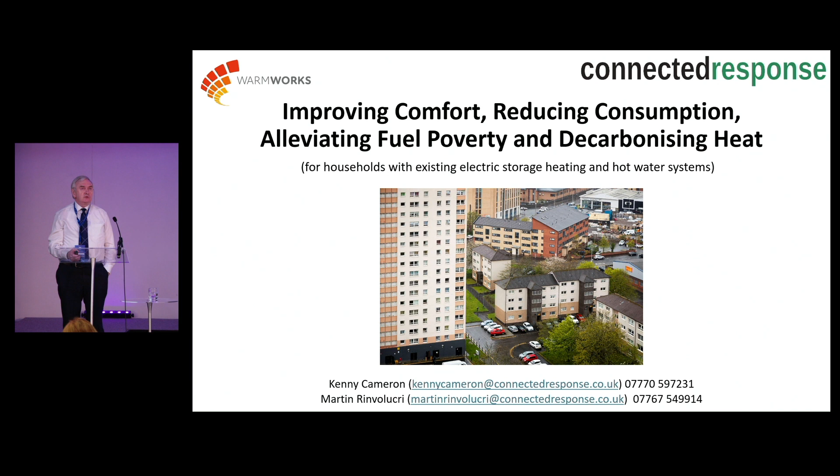Good morning. My name's Kenny Cameron. As Russell has said there, I'm one of the co-founders of Connected Response. We set the business up 5 years ago. It was 10 years in the making, though, because all the technology we have started in a 100 million turnover meter asset manager. Where I worked, we developed technology for social housing, actually with Westminster City Council, but it was never taken to market. So the business was formed to take technology that was there into a new market, not just in London, but across different parts of the country.

The focus for us has been about taking storage heating, which is incredibly maligned with good reason, because storage heating has been an invention in the UK for the last 40 years that generally has delivered bad heating experience for tenants. Not because storage heating can't work, but because for 40 years we've charged them at times to suit the electricity industry, not to suit the people that should be benefiting from the heating.

Storage heating was an invention to get rid of nighttime surplus nuclear generation. So it was quite an unashamed attempt by the electricity industry to dump something they didn't need and pretend it was a heating system. And I'm not making that up. There's long-serving people in the electricity industry that would freely admit that. So the concept was to try and do things better than they were before with existing heaters, to make people more comfortable, help them reduce their bills, and also to contribute towards decarbonisation.

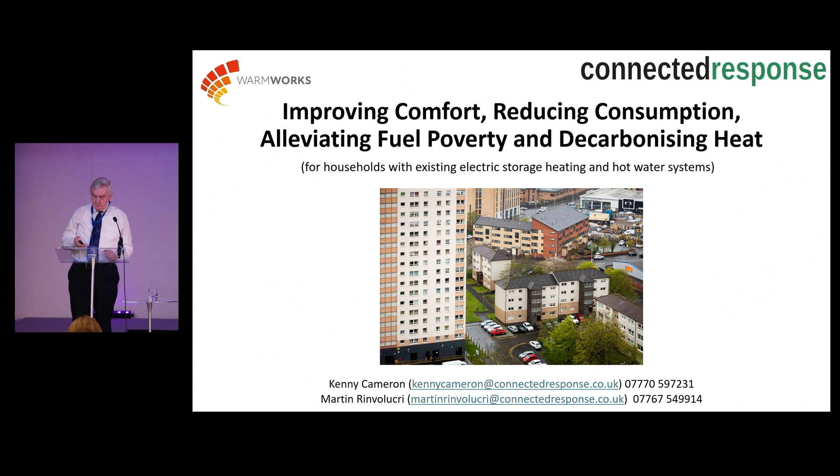There we go. And the problem with storage heating is that 99% of people in the country are on tariffs that are either Economy 7 or based in Economy 7. The concept of charging storage heaters for up to 7 hours a night, and that's a 24-hour day there, from midnight at one end on the left to midnight on the right along the bottom. And that's what happens when you put a big block of charging at night. You heat the storage heaters during the night. The blue line is the living room temperature, and the average temperature in a house that gets Economy 7 peaks at 8:30 in the morning. And I'm not making that up, that's from actual numbers we have from monitoring equipment in flats.

So it's pretty bad, and the effect of that is if it's cold outside, then that temperature declines gradually through the day, more rapidly on cold days, of course. And what you're trying to avoid is the situation where in the late afternoon and the evening, the house gets cold and people drop to maybe 17, 18 degrees. And that's not uncommon. So that's the problem. It's not the heater. The heater that we all talk about is night storage heaters. And of course, storage heaters don't know what time it is, so they'll take heat whenever you give it to them. So that's the problem that we've been trying to solve for a number of years.

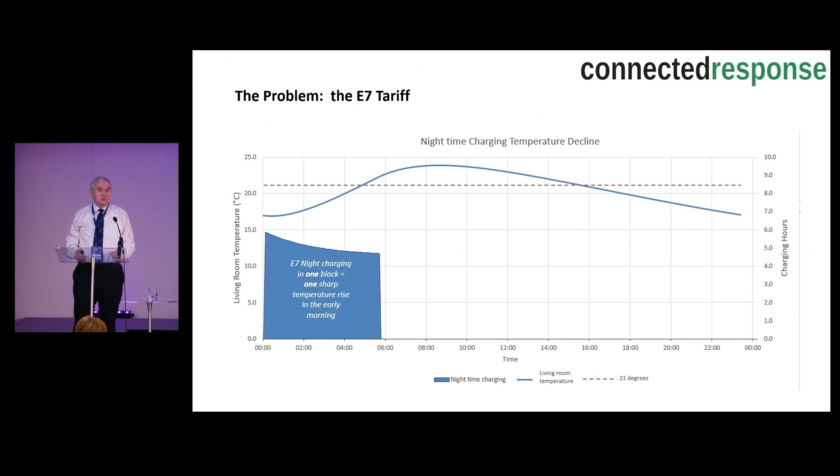We've been doing a project in Glasgow with Wheatley Homes Glasgow, formerly called Glasgow Housing Association, and that was to try and help them to do something positive for their 10,000 flats across Glasgow with storage heating, split roughly 80-20 between the multis and the low-rise. The breakthrough moment, light bulb moment for me back in early 2021 was we sat with their head of asset investment, and we realised his decision was going to be, do we invest in new storage heaters, or do we invest in new controls in those flats with storage heaters?

And I asked him the question, which was, how often do you intend to replace heaters? And he says, well, we're working on a programme to try and replace them gradually, and we've got money to do 1 tower block per year. And immediately I was thinking, you've got 132 tower blocks. So that doesn't sound as though it's going to happen very quickly. You'll have knocked them down before you've replaced many of the storage heaters. So straight away we knew there was a win-win, and they embarked on a programme there to put smart controls into all 10,000 flats, and they are 80% through that now.

We've done that with their direct labour organisation, City Building, who are a joint venture between Wheatley and Glasgow City Council. It's the former Works Department of the Council. And it's interesting to share it in this environment because I went into it quite negatively. I'd previously worked with City Building on a project several years ago where they were collaborating, or should I say not collaborating, with Keepmoat, a very tense relationship between two rival organisations. But I've got to say it's been a great relationship we've formed with City Building.

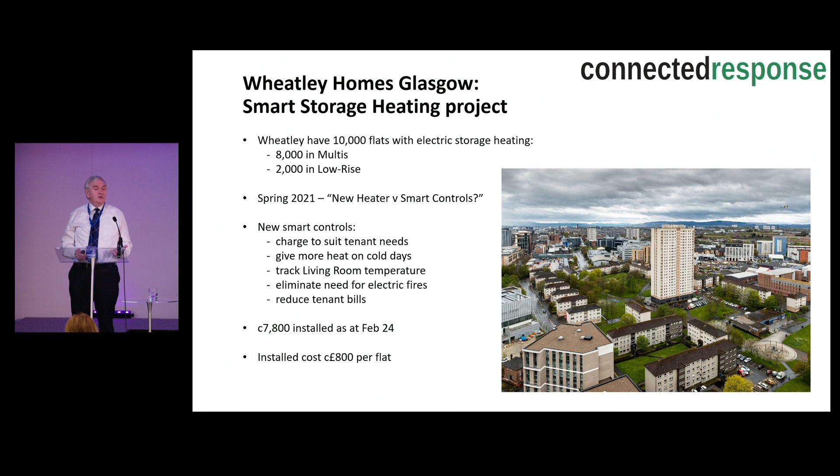The project began with the landlord setting aside money to replace 5% of heaters if there was old heaters there that were written off by the installer. The actual replacement was 0.5%, so it was a really minimal expenditure. And their average age of heaters when we started was 18 to 23 years old. That might shock you to think, are landlords still keeping those heaters going? But the view they took was, if the heater's working, we're not replacing it, we're charging it at better times.

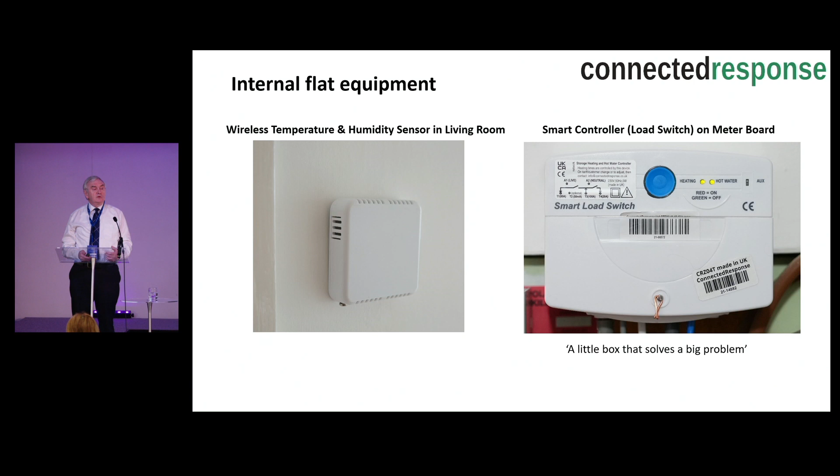That's what's installed in the flat. It's not very exciting. It's on the right-hand side, a smart controller that has two 100-amp contactors, one that controls the hot water, one that controls the heating, and in the living room, a temperature and humidity sensor that gives us feedback on whether we are delivering the service that's expected by the tenant. In a multi-dwelling unit application, the communications is run using a gateway, which is discreetly put into the building somewhere in an electrical cupboard, and using low-power radio, it's communicating to and from the switches and the temperature sensors.

The install in the flat only takes about 45 minutes. And by working with the direct labour team, the advantage in that is they are not only the installers, but in another part of their business, they are the maintenance guys. And maintenance is important because it's very naive to think you can go into a house and everything will be perfect. There's always consumer units that need work done, or other things that are unexpected. And that's been the great advantage of working with the team who are familiar to the tenant and are authorised to do other work when they're there if there's any remedial work required.

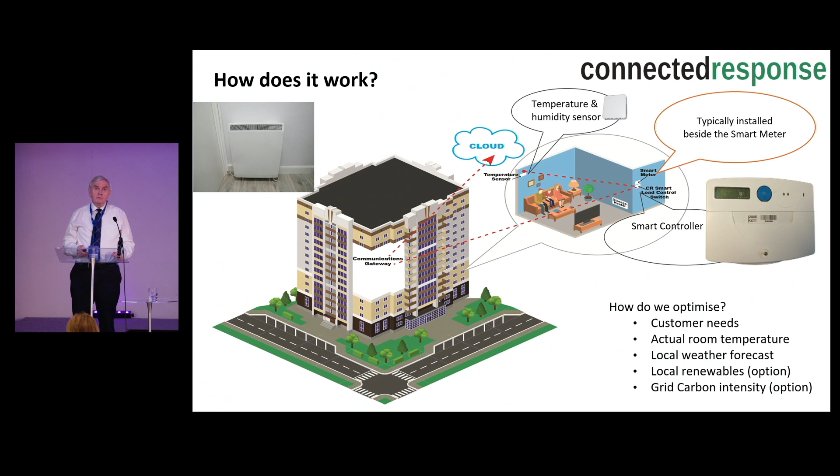The tariffs is a massive area where there needs to be continued change. I said earlier, almost everyone is still on night charging. We've been able in Scotland to get 1,000 people so far, 1,000 of the 8,000, onto a new tariff, which is also an old tariff, Economy 10, which means people get 3 charging times during the day.

So the tenants, I've got to say, tenants generally don't understand this. I've kind of given up on expecting that tenants will really understand what we're doing. I don't say that to be patronising, because I've often been in people's houses. 2 years ago, we tell them we will charge your heaters for longer on a cold night, and they understand it. And then 2 years later, when there's a VIP coming in, I'll say, remember, it'd be good for you to explain that it charges at different times every night.

And even the most intelligent people often say, oh, really? Is that what happens? So it's proof that the tenants don't care about the technology. They don't care how it works. They just want to be warm. And we shouldn't really expect too much of any of them, because people have many other things going on in their lives.

Time of use tariffs is an area that we spend a lot of time lobbying Ofgem, lobbying government, to say, don't allow suppliers to focus on developing tariffs for middle-class early adopters, tariffs for electric vehicles, for batteries, for solar. Unfortunately, that's where all the work's going on. And we are pushing hard to try and say there should be more flexible tariffs.

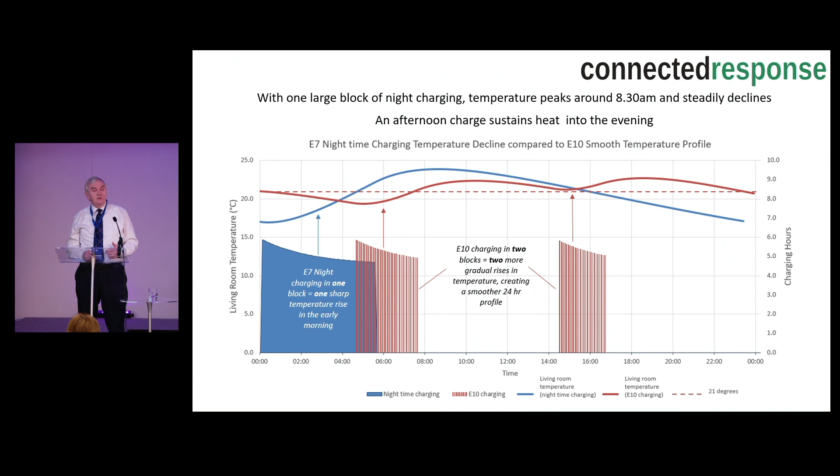I talked about the problem of Economy 7. That's how the Economy 10 looks in contrast. So think of it as, instead of the big blob of blue to the left, it's split into the blobs of red, closer to when they wake up, middle of the afternoon as well. And what you do is create a much smoother temperature profile, so you don't have the peaking too early, and you have the ability to watch television at night without having to either go to bed early or put a jacket on or switch on an electric fire.

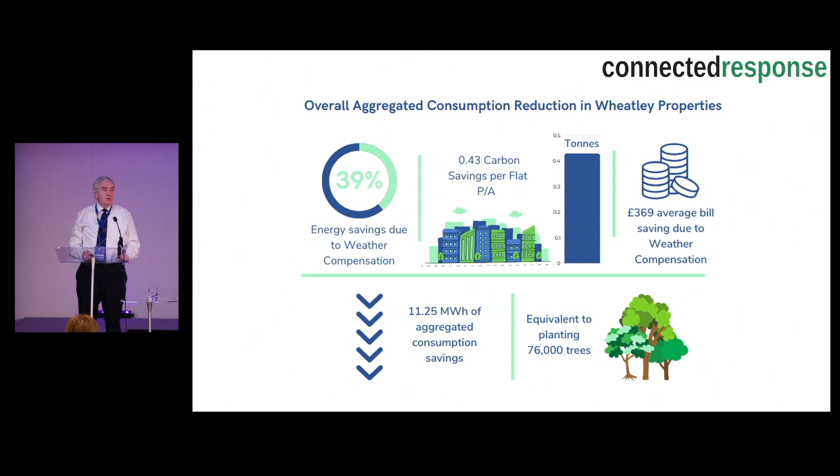These are some of the statistics from Wheatley Group in their interim report to Scottish Government, who part-funded, showing how much they've saved just by charging according to the weather, how much they've saved in terms of people's individual bills as an average, and also what contribution it's made to reducing the carbon emissions for the group as a whole.

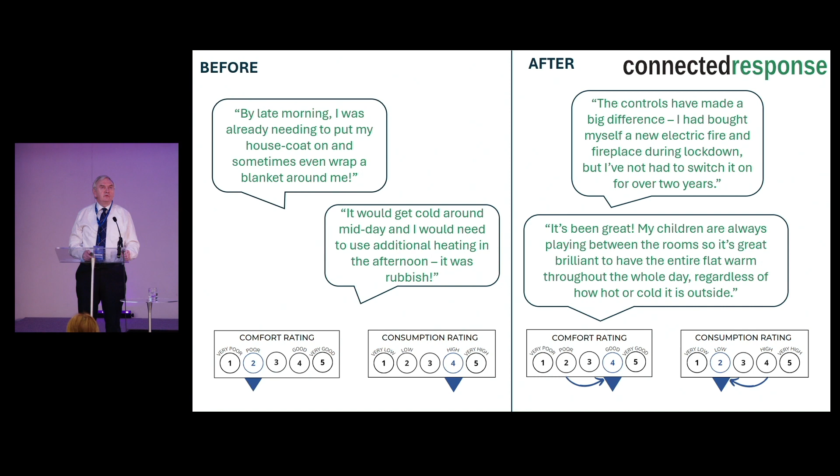We've just done a video for publication, and there's one lady in her early 50s, and she was most excited by saying, my brother even comes to visit me now. He never came before. Now he'll come at night because my house is warm. So things that are not that obvious in terms of the social benefit you can learn by getting good customer feedback.

I want to finish by just briefly talking about an organisation in another part of the country, the Royal Borough of Kensington and Chelsea. Someone earlier on was asking me what it was like working with them post-Grenfell, and it's actually been good.

I've worked with them before and after. If there was any observation I'd make, it's that they're so tenant-focused now that they sometimes do things at a slow pace, because they always want to check what the tenants, what the leaseholders will think about it.

We began working with them on this project in 2020. At that time, they charged all the storage heaters every night. Even in the summer, if people left the heaters on, and some did, then they got a full night charge. They got a full tank of hot water, even if their flat didn't have a bath and had an electric shower. So massive overconsumption, and some tenants who took advantage and others who complained about those that took advantage. So the project kicked off then.

The tower block, I'm not sure if any of you recognise it. It's often described as the ugliest tower block in London or the most beautiful, depends on your point of view. I think it's quite an attractive building, but I'm biased, having spent a lot of time in it. So Trellick Tower, that was the conditions before.

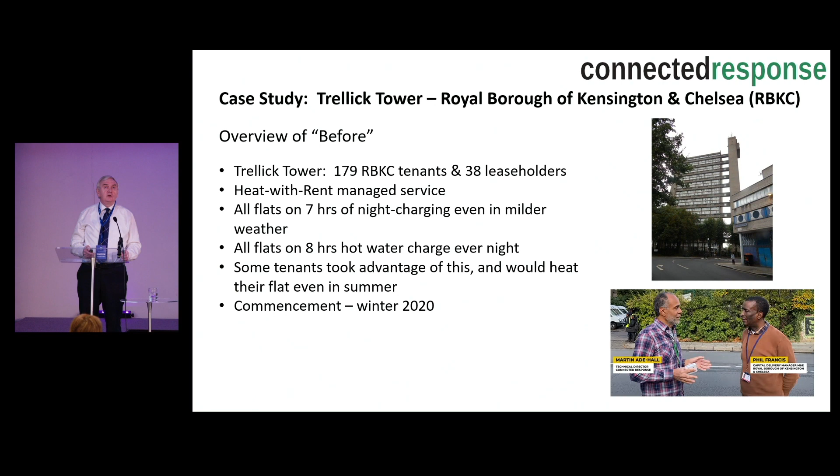And what the landlord wanted to do was to reduce the waste, because they knew there was massive waste. Reducing waste in turn would reduce people's bills. They wanted to improve the heating experience by not putting all the charge in during the night. And in the future, which has still not quite arrived, they wanted to be able to align the charging with renewable energy, because they knew that made sense.

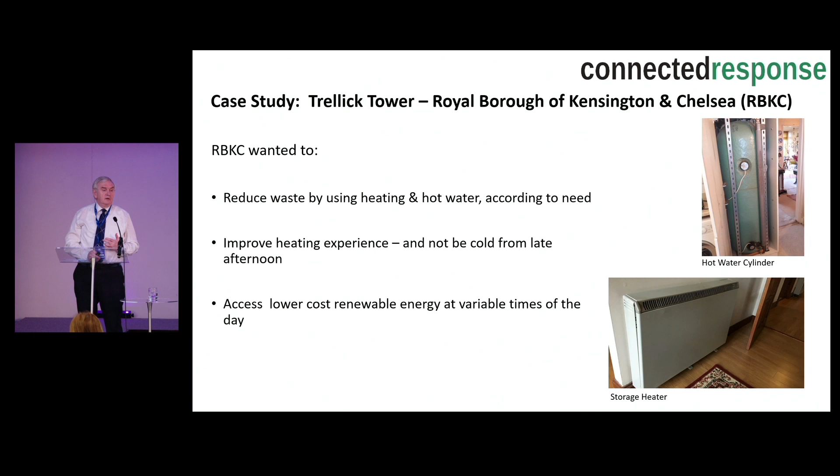We're actually just about to start a project that will every night charge the heating at slightly different times dependent on the carbon intensity of the grid in London. So it's a project to track how much fossil fuel generation is happening tonight. Is it at 3 in the morning? Is it 4 in the morning? So that our system can say, do we care whether we charge at 3 or 4? And if the answer is no, then to be able to flex every night. The predictions are it will reduce carbon emissions in that block by 14%. So for those who are targeted to do that, a very exciting proposition.

The project that we did was in 3 phases. It could have been in 1 phase. It would have saved them more money if they'd done it all together, but the conservatism I hinted at earlier meant that they started by saying, before, we charged everyone during the night for 7 hours. The first phase, they said, let's put the controls in and we'll give people 3 charges: nighttime, afternoon and evening. The second phase was to say, once we've done that, let's switch on the weather compensation and give them a lesser charge or a longer charge as appropriate.

And the third part, which happened maybe 9 months to a year later, was saying, we're massively over-providing hot water. This, I should have said, was a heat with rent scheme. So it's a managed service where people get the service and pay a flat charge every month for it. So they said, do you think they would notice if we gave them less hot water?

And we were sure they wouldn't, because they were giving probably 6-7 hours of hot water at one stage, and the landlord we deal with in Glasgow was recommending 2 hours. So we knew people were happy with 2 hours when they had a shower in the flat. All they needed hot water for was to wash hands and wash dishes. So we knew it was fairly safe to wind that back a bit, and that's what they did.

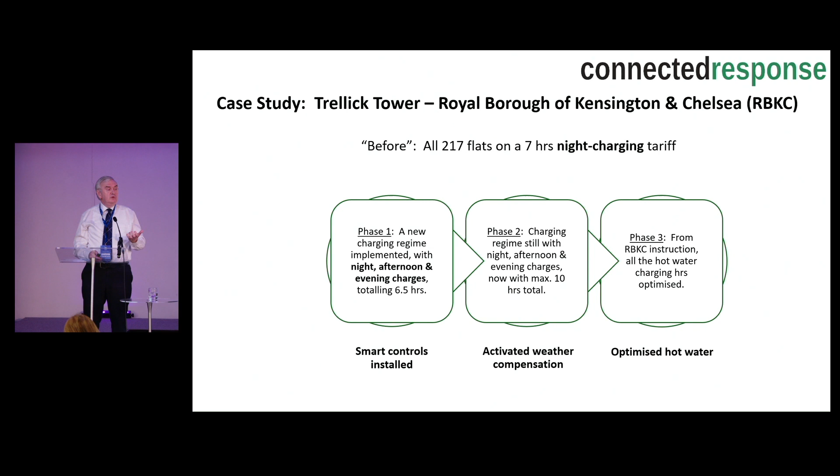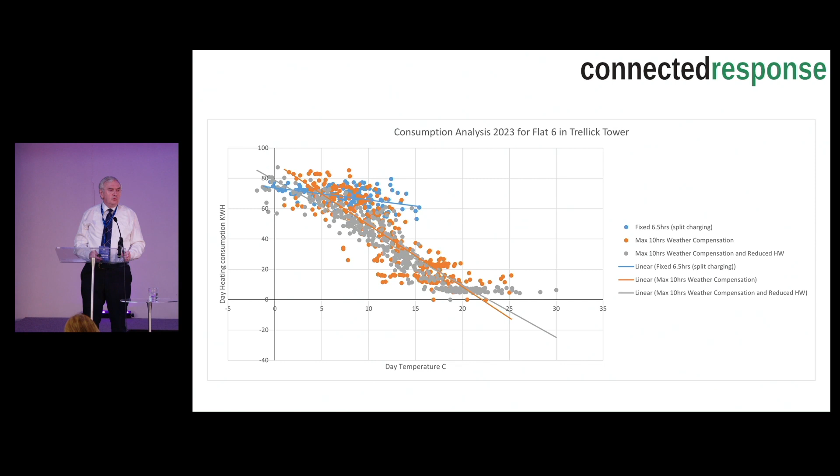The consequence of that was that we had half-hourly metering on all 217 flats, so we now have 3.5 years of data saying, what does it look like? What did we save? Did it impact on room temperatures? Don't worry about trying to understand this, but this was just for a typical flat, anonymised flat 6, to say how much energy did we consume, that's consumption up the left-hand margin, and how did that compare with the outside temperature, going up to about 30 degrees along the bottom axis. So we could plot what happened at each phase of the project.

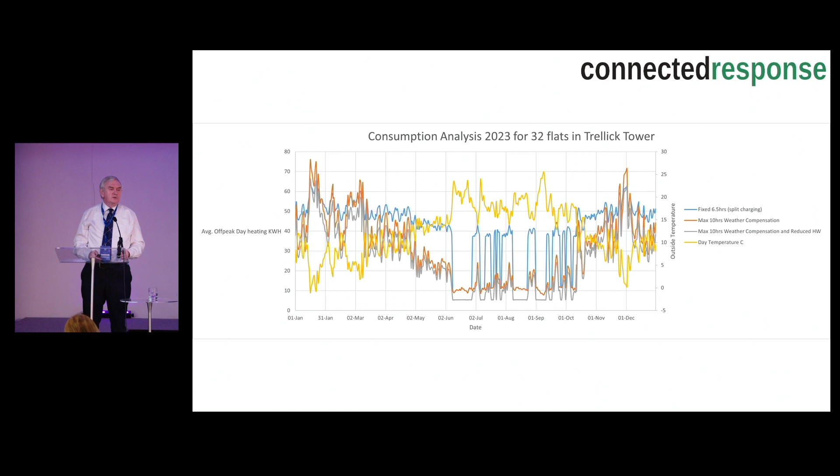We then could say, what does that look like in aggregate? I'm not asking you to consume that either, but we took the half-hourly data and said, that's what it looks like as an average. You'll see in the average, there's lots of blue spiking in the summer, because there are some days when people do want the heating on, even in London in the summer.

If we averaged it out over months, this graph tells us that the yellow line peaking in the middle shows it gets warm in summer, and on the left-hand side it gets colder in January than in December. So that's the outside temperature.

The blue line shows that people keep the heating on into the shoulder seasons of spring and autumn for much longer than they need to. There are people who will keep the heating on and open windows if they can get away with it. So that was the bit we're trying to change.

We switched the weather compensation on, which is the brown line, the first of the sloping lines, and then the grey line, which you probably can't see as a colour, was then optimising the hot water. So it gave us 3 phases to say, what difference does that make?

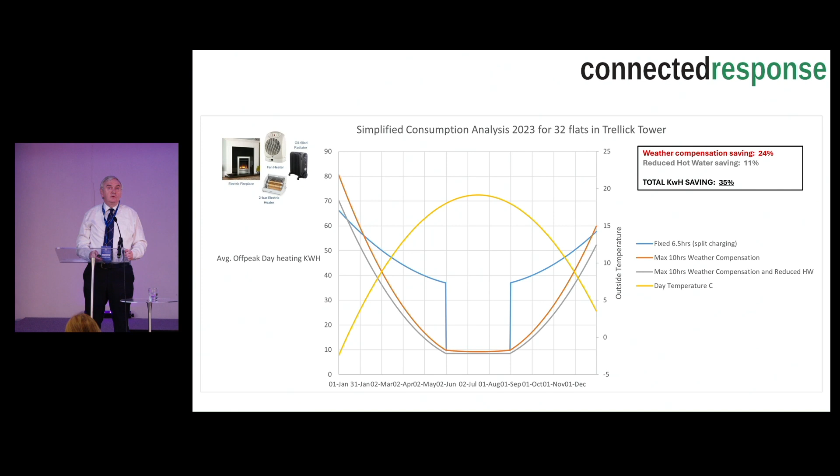The box on the right-hand side gives you the breakdown. The weather compensation, charging appropriate to need, reduced consumption by 24%, and optimising the hot water added 11% on top of that. So big savings, reductions for the landlord, which they in turn pass on through the following year's heating and hot water charge.

The saving was that area under the curve. That was where they'd made significant savings, because they weren't allowing people to keep the heating on and open the window. The savings on bills were estimated at about £800 for that group of flats.

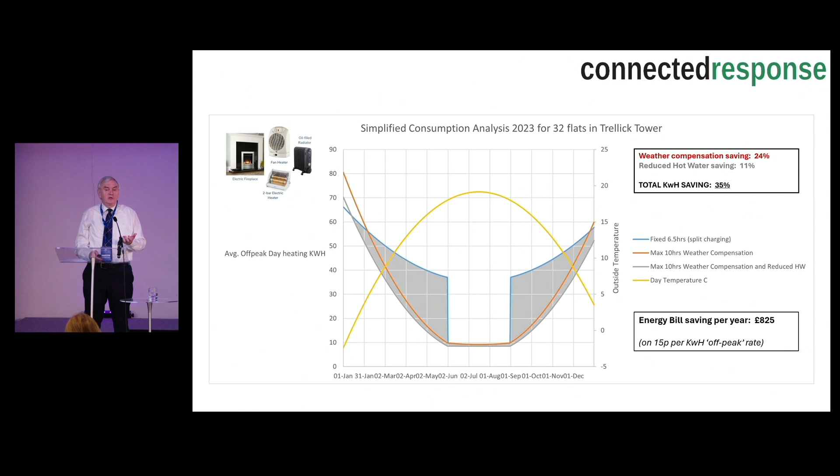That, of course, depends on what tariff they're on. Their savings there would actually have been higher in a normal year, but of course we've not been living in normal years for the last 2 years. It's been so much dependent on when tariffs were renewed with energy suppliers.

So that's a race through some of the things we've been doing.

I'd leave you, this won't be relevant to all of you, but to those in organisations that still have electric heating, to put that in context, storage heating is found in 1.5 million houses across Great Britain and Northern Ireland. There's still a lot of it out there, ranging from cities like Glasgow, where it's about 12%, to London's about 8 to 10%.

So big variations, but if it's relevant to you, it'd be great to tell you more about it and give you some insight into how we can not throw the baby out with the bathwater, in the sense that storage heating is maligned, but we should be looking at how we're using it, not how it's currently delivering. So happy to take any questions now or talk to you in the breaks.